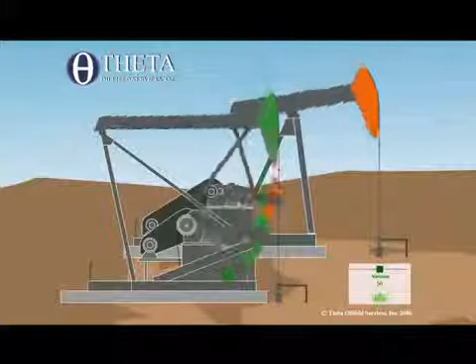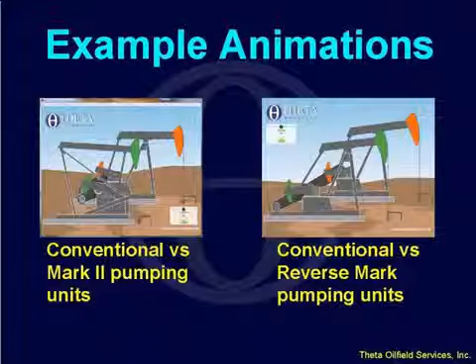Another nice thing about this is you can use different players that are available. For example, this player right here, I can actually pause and control, well maybe not this one. It depends how they're built, but you can control the animation by moving a slider. I think I can do that with this one. No, maybe not this one. Anyway, we can do this.

This is a reverse mark versus a conventional. Now you can clearly see the differences here between the reverse mark and the conventional. The conventional is the one in the back with the orange horse head, and the reverse mark is the one in the foreground with a green horse head.

You can see the Pitman arm angle. This is the reverse mark. You can see how that gearbox is further back as compared to the conventional. You can also see the speed, the reverse mark has a slower speed on the upstroke as compared to the conventional, and then a faster downstroke.

I can actually use this slider to go back. I can go to any part of the animation here, pause it, go back, look at it in more detail. So it allows me to do some things that we couldn't do before. This is more interactive than the previous generation of animations.

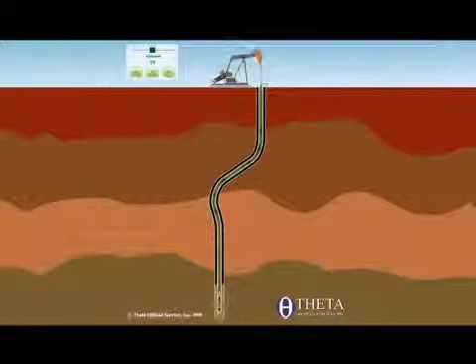This is an animation of a deviated well bore. Again, you can zoom in and look at the rod guides. Or you can look at the surface unit.

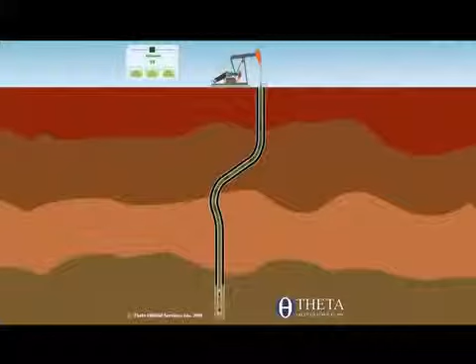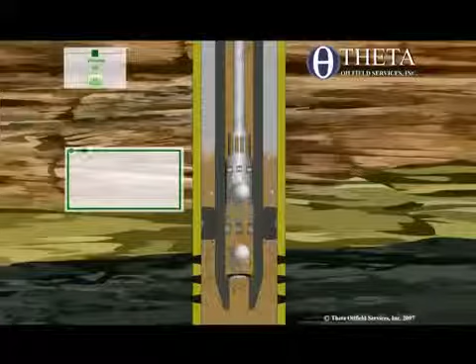But what I like the best is the downhole animations. This is a full pump. Again, if I want to look at part of the animation, let's say I want to look at what happens to the standing valve, I can zoom in, and I can actually go to the part that I want to see and zoom even more.

You can see the gas coming out of the perforations. I can look at the traveling valve and how that works. Are the gas bubbles getting larger? Yeah, which is what actually happens, right? Because they collect, they merge together? No, as the pressure goes down, they get bigger.

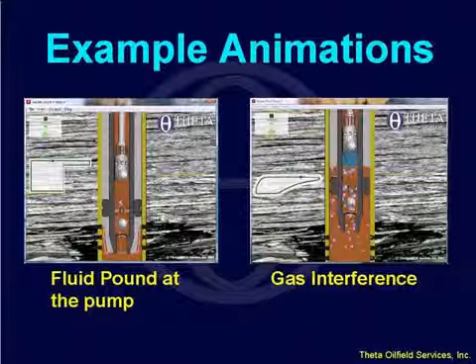Here is fluid pound again, but this is better than before, more realistic. See, the gas that goes through is low pressure gas that comes from the casing, so it's slightly higher pressure than the casing pressure gauge shows. So the plunger basically has to hit the fluid to unseat the traveling valve.

When that happens, especially in the middle of the stroke, that will give you a large impact, which can cause the rods to buckle, and it puts a big pressure wave in the pump barrel, which can cause a barrel split, or it makes the traveling valve jump off its seat and hit the cage and get pitted and so forth.

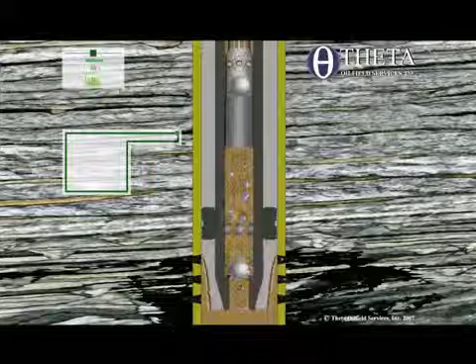Gas interference is a good one. When you have gas interference, you have a lot of gas that goes through the pump, and then you have to compress that gas before the traveling valve can open. And when you compress it, the gas will go through, and then it'll hit the fluid, and the fluid will go through. It's actually very close to what you were showing, or what you videoed, right?

Yeah, it's pretty close to an actual video of what happens when you have gas interference. The beginning of the upstroke, you're expanding the gas, this is the gas expansion part. Both valves are still closed. Then finally, when you expand the gas enough to open the standing valve and pick up the fluid load, you have a constant load for the rest of the upstroke. And then on the downstroke, you have to compress the gas in the pump before the traveling valve can open.